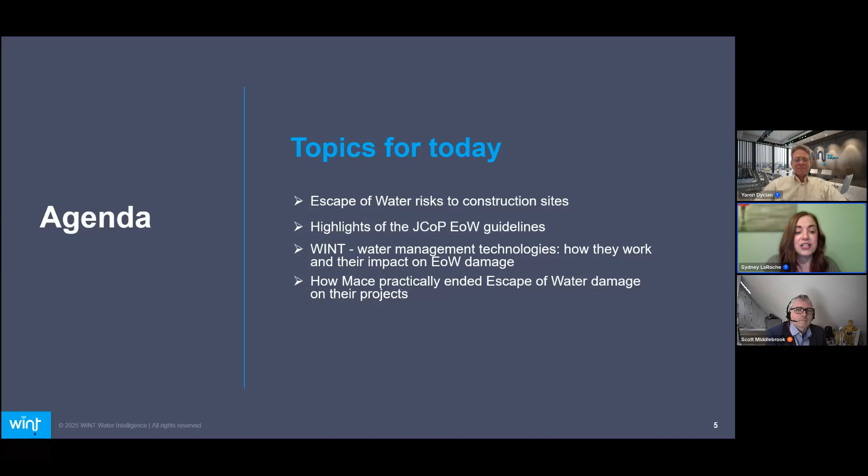Here you'll see a few of our learning outcomes for today. We're really excited to bring you some highlights from the JCoP Escape of Water guidelines and some strategies on how to best implement your water strategies. And with that, I'd love to turn it over to Yaron. Yaron, you're on.

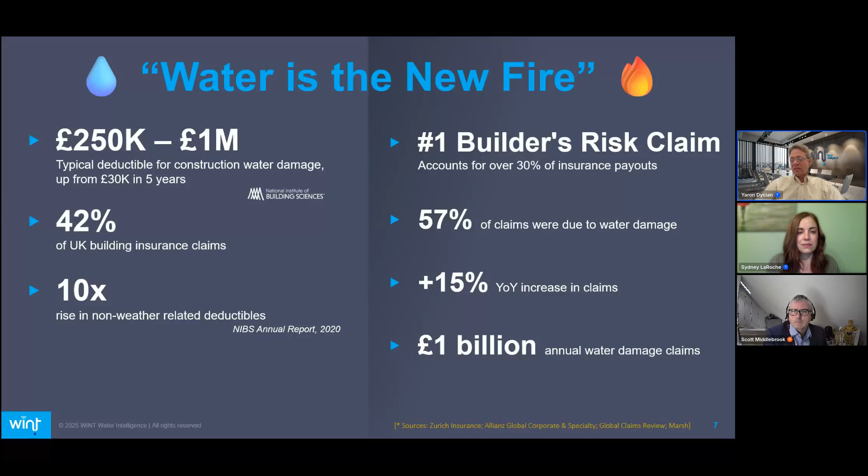And so this group of experts from insurance companies and other industry experts has assembled to release JCoP for Escape of Water. It includes experts from insurance companies, from CIREG, from the Chartered Institute of Plumbing and Heating Engineers, and other groups of experts. The first version was released 4 or 5 months ago in August last year. It applies to both new construction and renovation projects, any project over £2.5 million in contract value.

The code itself will be or is already being required either in the construction contract or by insurers. It is a gradual process. I do not believe that it is broadly required yet, but clearly it is coming because I think the industry has had enough with water damage on construction projects. So it is coming. A few of the key elements, and we'll dive in some detail, though of course we can't cover this large of a code in one session.

The key elements are a set of planning guidelines, how to properly plan, how to use technology, what are the processes and procedures, and what are the roles and responsibilities. Covering all of this in a lot of detail, the JCoP for Escape of Water outlines the methods and the things that need to be done in order to put an end to this very painful problem. What are the key provisions?

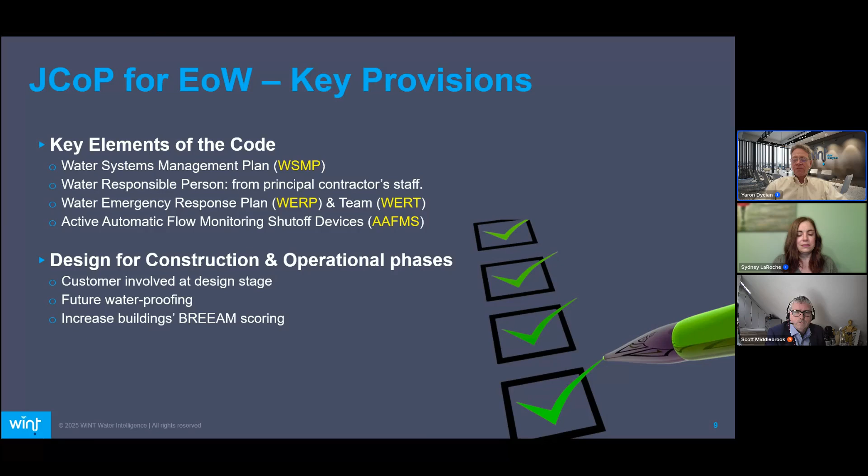So on the operational side, you already have a building that is much more waterproof for the future, for its life cycle, and you can increase the building's BREEAM or LEED scoring quite significantly by including these elements. So a few good reasons, cost, future waterproof, and increased sustainability scores all drive towards planning upfront and doing things at the planning phase.

Let's take a look at the Water Systems Management Plan. The requirement says develop a plan for each project. Every project is different, so every project requires a dedicated, customized plan. It should encompass all project stages from design through construction, testing, commissioning, handover. And as we know, even after handover, during the defects liability period, contractors are still liable for damages. So effective solutions will cover that. In fact, some of the largest damages that I've experienced in the past have happened during the defects liability period.

Overall responsibility for this is with the principal contractor. And this is important, it should cover all water systems in the building. Historically, we've seen solutions that included some subset. Typically, it was the domestic cold water lines, which naturally is important, and probably most fittings and most pipes in the building are domestic cold water. However, there are many other water systems, from sprinklers to circulating closed loops, LPHW, low pressure hot water, domestic water systems, and so on. Temporary water, by the way, is mentioned very specifically. So every one of these water systems must be managed and included in the protections provided by the Water Systems Management Plan.

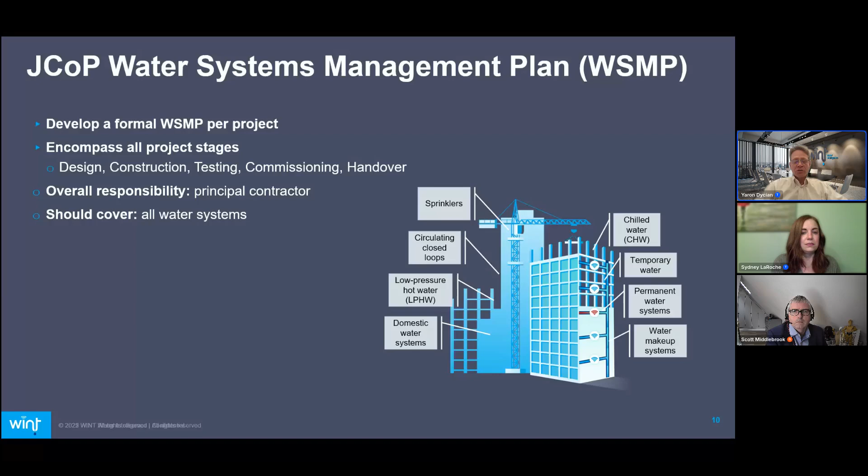The emergency response plan, as expected by the name, is a plan that should handle water incidents as they happen, effectively, quickly, and efficiently, so the damage is minimized. And this, as the rest of the water management plan, should be created pre-construction with clear roles. Who is the water responsible person? Who takes care of this? Who is the water emergency response team? So it actually includes a named list of people who will take action when an emergency happens.

You should define response protocols. How do you shut off upon an emergency situation? How do you reinstate water? By the way, historically, I've seen reinstatement of water become a liability when not done right, because if an incident happens and your automated shutoff systems shut off, sometimes you have unauthorized people opening the valves, and now you have a leak happening that a person has overridden. So reinstatement of water is a very important part of any emergency response plan.

And finally, of course, root cause analysis, so that learnings can be applied and things can be improved for the future. The plan must also include training. Very important and highlighted in the code a few times is valve locations and controls. And of course, ongoing refreshers for the staff, both general contractor staff as well as subcontractor staff should be refreshed and retrained every period.

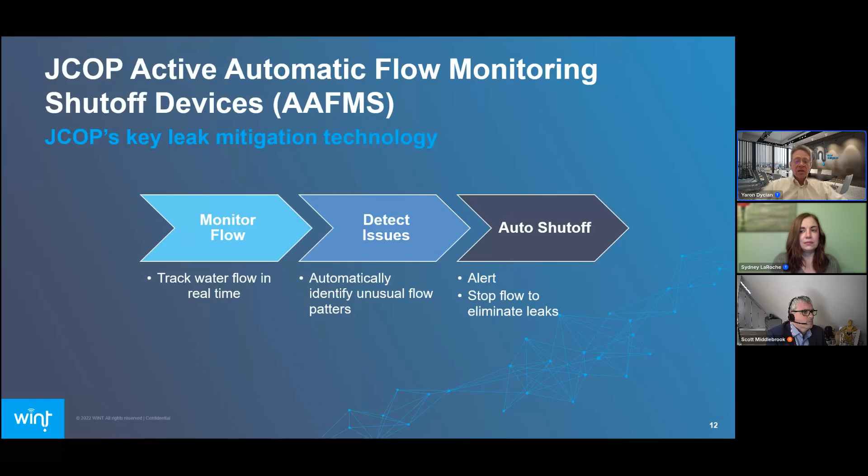I assume most of you are familiar with the concept. The idea is to monitor flow. You track water flows in real time. The system understands what these flows mean and what is abnormal, and when something is happening that should not happen. And it automatically identifies unusual patterns and then takes action, automatically shuts off, and or alerts, depending on the preference at the site, at the time, and so on. Conditions may change, requiring different behaviors at different times of day.

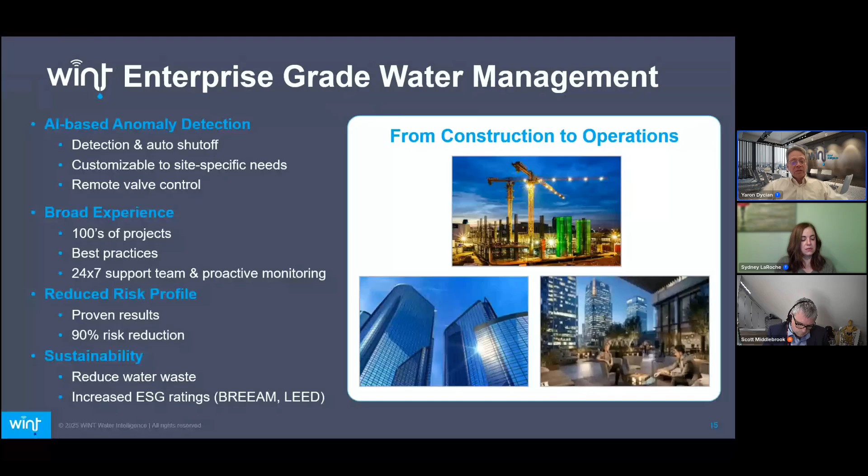Results of our work have been proven. I'll show in a few slides the proven results that eventually end up at over 90% reduction of risk, measured by some of the world's leading insurance companies. We also bring sustainability to the play, and sustainability is not the primary reason for implementing this type of technology on construction projects, but it is important for construction projects, and it is critical for operational use. We provide the sustainability benefits, first of all, of course, of reducing water waste. Typically on commercial buildings, a quarter of the water goes to waste. And we also provide a significant increase in ESG ratings, BREEAM and LEED, where we can really help increase the building's overall sustainability score.

In terms of implementation, customers start working with us by providing us the plans as early on as possible. We will start working with the team's engineering experts to design where valves and meters should be deployed at the site. We provide those diagrams. They will be installed when the actual pipes are put in place at the site, and they are connected to control devices that know how to monitor the flow and to control the valve.

An important aspect on practically every construction site I've been to is communication. These devices need to communicate, or otherwise alerts will not go off. By the way, the devices are totally autonomous, so they will take action, but you will not know what action has been taken, and you cannot command them remotely if communication is down. To maximize that aspect, we have solutions that can communicate on cellular, Wi-Fi, or Ethernet. They can fall back between themselves, and we have put in place multiple elements to support the communication capability.

Experience tells us that it is a challenge. Construction sites will not always have cellular coverage before the building is ready. If it's a high building, high floors typically need cellular boosters that are put in place only at the end of construction. Wi-Fi, while we work with some of the best in the industry, and they are putting in Wi-Fi on their sites, it's usually a hit and miss game. It's a little bit difficult to keep it up at all times. So bottom line, we put in place practically every solution from remote antennas to multiple communication methods for these systems.

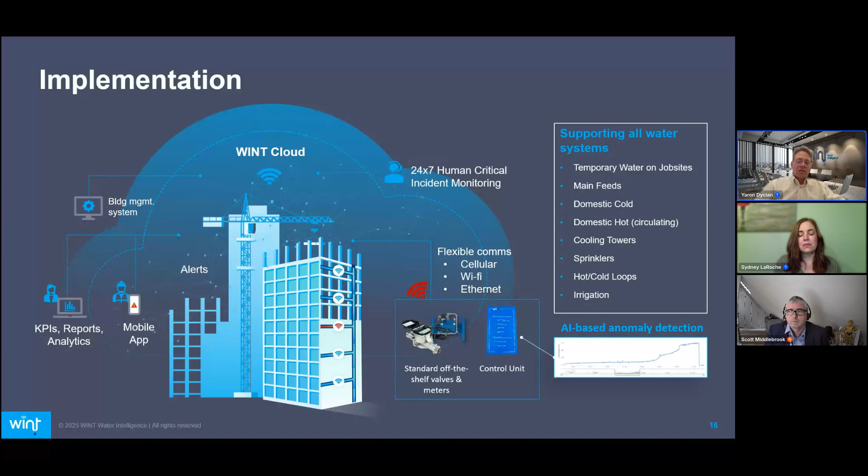The systems are supported by a mobile app on the site, and of course KPIs, reports, and analytics on a website. They can be integrated with building management systems. And as I mentioned before, they are covered by a second layer of defense, human monitoring, that is critical in our experience to help with some of the issues that arise. They support every water system in the building, from temporary water to main feeds, domestic cold, domestic hot, circulating loops, and so on. We've built algorithms and hardware to support every one of these systems.

The systems will use a combination of active policy settings, for example, do not allow more than 30 liters during the night to flow in this location, that would be a very simple rule, to AI algorithms that use pattern recognition. Pattern recognition can be based either on normal patterns learned at the site or on things that we know are typical behaviors. Construction sites are not trivial to learn for normal behaviors because they are quite erratic. And so we've built in specialized capabilities to support those. You can see one of those here below.

What you're seeing here is a gradual pipe degradation. Typically on a construction project, this would be a bad fitting, which starts to drip away. And so flows are extremely slow as the drip starts. But over a few hours, it will increase as the fitting degrades, and you can see how flow rates increase. The system alerted first, detecting this pattern right around here. And since that did not resolve the issue, a short while later, it shut water off.

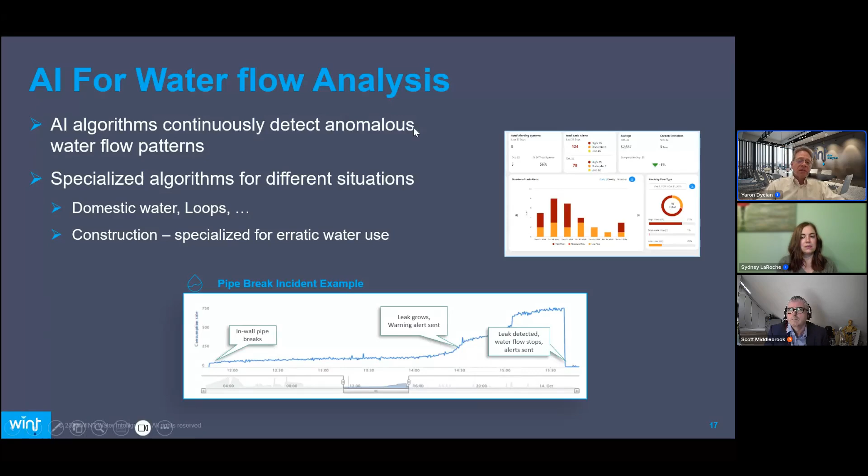Some water will always go on the floor, of course, because you can't prevent the leak before it happens, but very minimal. And so this is an example of how a pattern recognition AI algorithm will detect the problem. And the best practice of combining fixed rules with AI-based solutions will typically provide the best use case and the best solution.

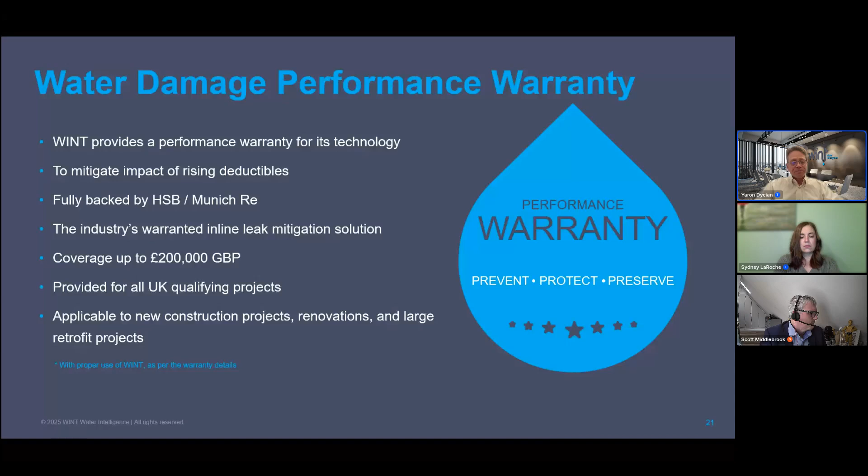And with this, we will transfer the conversation to Mace. Mace has implemented a very rigorous best practices plan and water management protection plan. And I'll let Scott take it from here. Scott, the stage is yours. Thank you very much, Yaron.

So, hello, good morning from sunny Northamptonshire. My name's Scott Middlebrook. I'm Mace's Chief Electrical Engineer. And I know what you're thinking. This is an escape of water seminar. Why have you got an electrical engineer there? Well, anybody that knows me knows I love a process and knows that I love to manage a process. So in 2022, the business gave me the water processes to look after as well, to make sure the documents

were updated regularly. And for those of you that don't know Mace, we're a 2.5 billion turnover construction company worldwide. Predominantly in the UK, we do a lot of projects from very small interiors fit-out projects all the way up to your Battersea power stations. So these documents I'm about to talk you through and these processes, we apply to all those projects because it is doable. Could I have the next slide, please?

So as principal contractor, we are down to plan, manage and monitor the works. Obviously, there's coordination of health and safety on there. But from a water management perspective, at the plan stage, we need to identify all control measures for any escape of water. Now, this comes in the form of the flood mitigation strategy, which I'm going to talk to you about on the next slide.

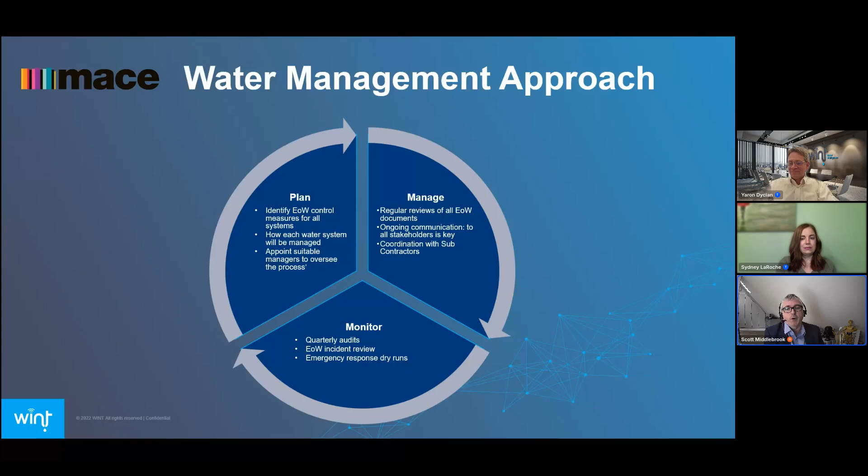The team then complete thorough reviews of each element of it. Are there any lessons learned? Have we had any recent sort of escape of waters? We've got a thing called the Knowledge Hub on Mace Way that the teams can go on there to see if there's been any recent escape of waters. And more importantly, what lessons do we learn out there? What should we be doing better next time? So the team then will review the risk schedule as per the flood mitigation strategy, and then it's signed off.

We then take that flood mitigation strategy. Once we start getting water on, we then go to the water management plan. Now, this starts in pre-construction. Now, the PD, the project director, will appoint the water responsible persons for the project. At Mace, we have a lead and we have a deputy, because people have holidays, people are away. So we've got to make sure we've got that cover there as well. The project will then fully complete the water management plan for the project. That will include all the risks identified in the flood mitigation strategy.

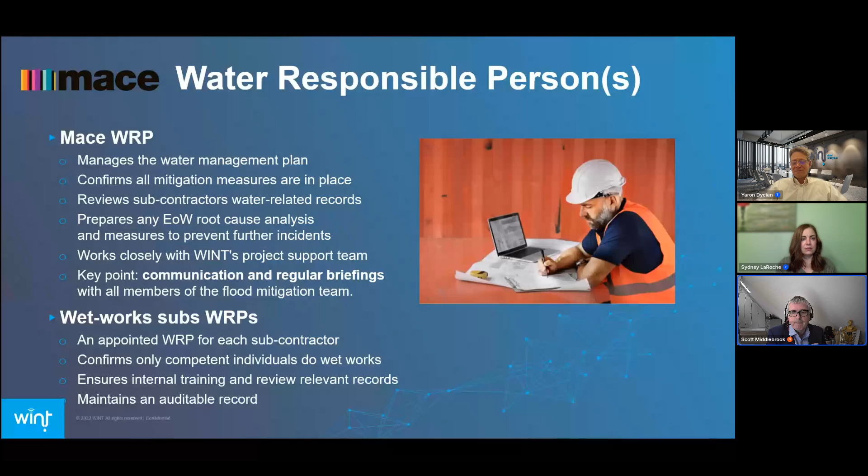As I mentioned previously, we do permits and we do audits. So any works on a live water system will require a wet work permit. This is issued by the Mace water responsible person. This is to confirm that all the relevant control measures are in place. We've got a suitable clear up kit. We've got suitable points of isolation, suitable RAMs in place, task specific RAMs, to make sure before we start doing that wet works, we've got everything in place to control any escape of water.

On top of that, as I said previously, we do quarterly water compliance audits, a 25-question audit. That's done by the Mace water responsible person. But I do like to get out and about. If you're on Mace jobs, you will see me float about from time to time. I did 45 site inspections and electrical and water process audits last year. I do come out on an annual basis and do a thorough deep dive, not just in the process-based paperwork, but also on site as well, to make sure that the two tally and we are working to our processes. Next slide, please.

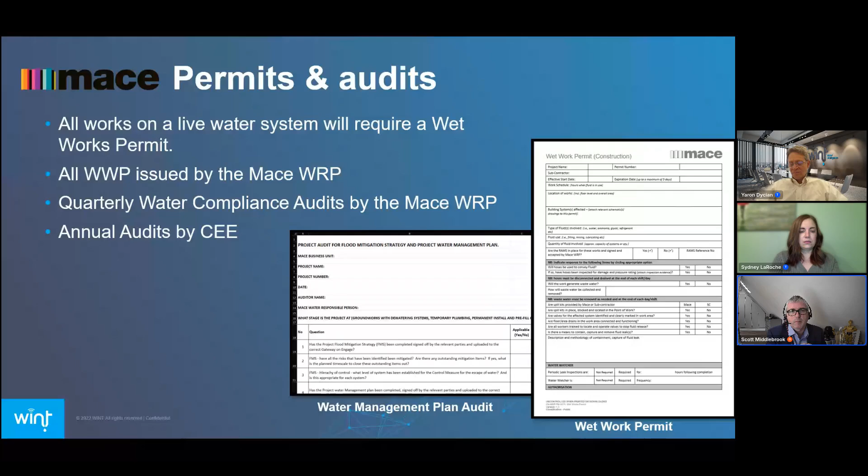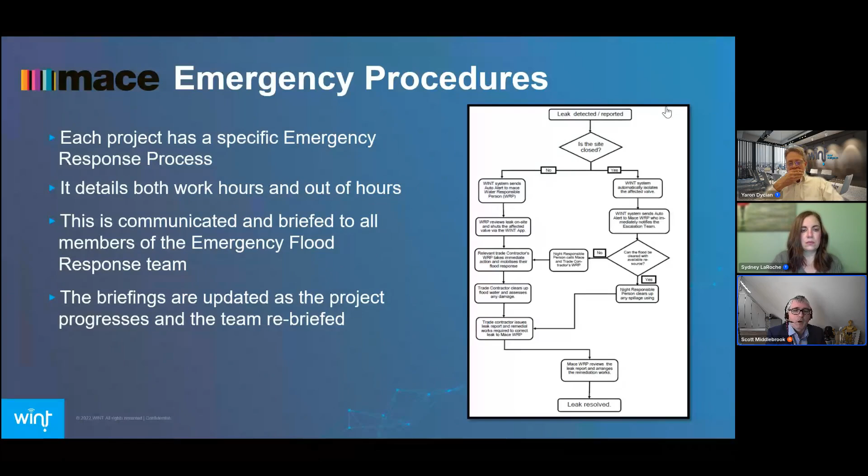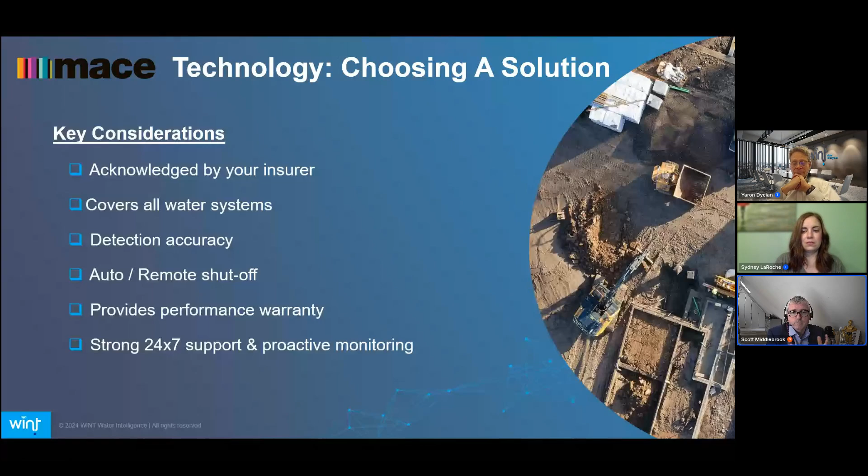So the key consideration: the WINT system that we use is recommended by our insurers, and it does cover all wet water systems as well. It does generally give accurate detection of any escape of water. And as I said, all the water responsible persons will download the app, so they can shut the system off if they need to. I'll let the last two speak for themselves. And go to the next slide, please.

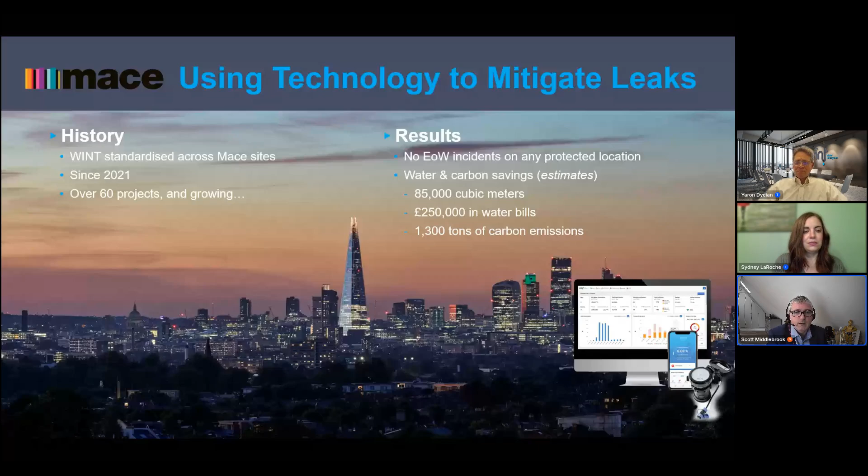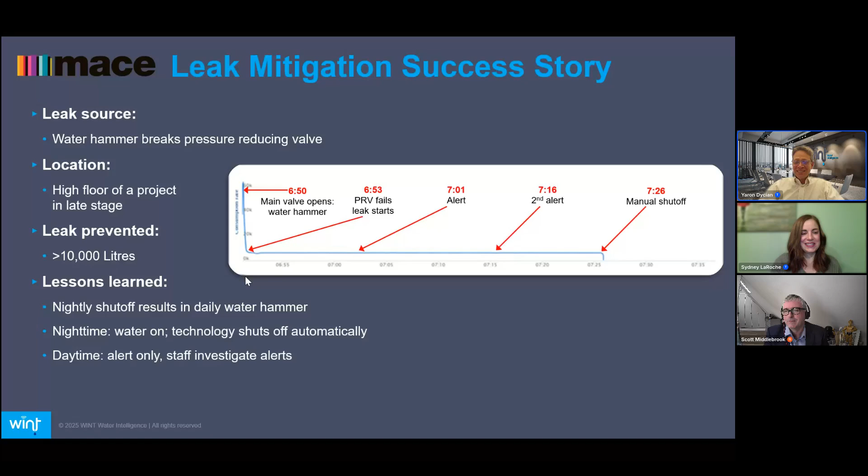And I think that's me. I had to go a bit rapid there, Yaron, because you were a bit behind on time. You promised me you said 15, 20 minutes, but go on, Yaron, I'm with you. Thanks a lot, Scott. That was great. And I'll pass it over to Sydney. Excellent.

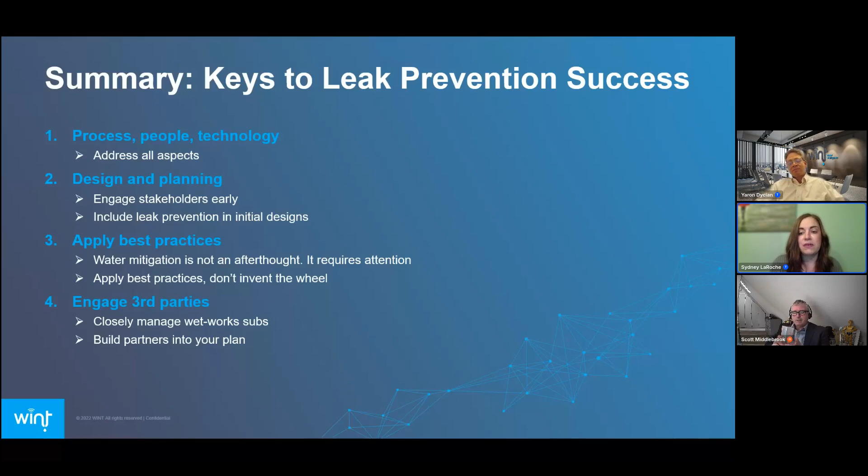And to kick us off, I have a question for both of you, which is, how do you see JCoP changing the future of water risk management on construction sites? And are you aware of any upcoming legislation relating to the use of or management of water on your sites? Do you want to go first, Yaron?

Sure. So I'm not sure we're going to see legislation in this respect. I think this is more a commercial aspect between the contractors and the insurers and obviously the customers. So this type of regulation and the requirement to use it will likely not become legislation, but will become a staple of insurance policies and of construction contracts. I'm not sure how it will evolve over time.

Naturally, things that come up as first phase have future phases, and they improve as learnings come along. I think there are things in there that probably will be changed. I think Scott's example of that water hammer, a result of water hitting the pipes when it's opened during the morning, is an example. I believe JCoP currently is asking for water shut off during the night. Our experience says maybe not an optimal solution. Things like that will get embedded as the standard becomes more tried in the field.